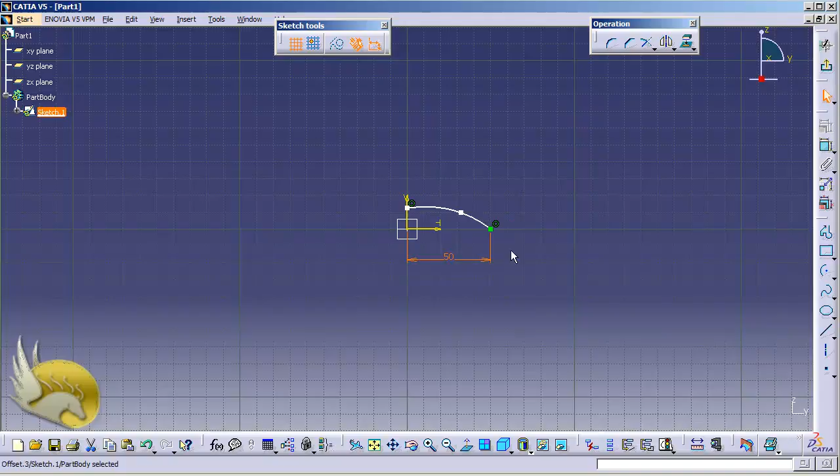First constraint is this. This point is going to be about 50 millimeters away from the center line. So I type in 50 here. And again, the constraint tool is selected. This point is going to be about 10 millimeters from the horizontal line, so I make sure that it's about 10 millimeters. And I can grab this point and move it so that this is the perfect curve that I needed.

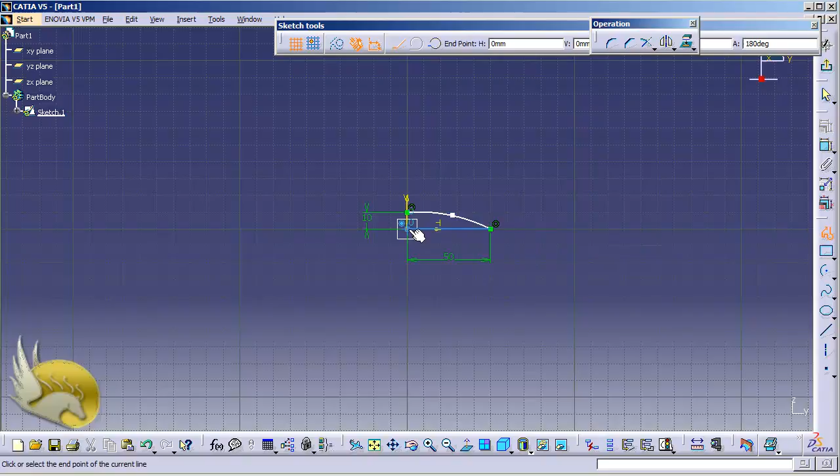Now I select the profile tool to complete this profile. I click here, go to the center line and go up to this point. You can see the filled circle that tells me I'm on a point. I double click here to finish this profile. Now I exit my workbench. I have this profile and I can use this for shaft.

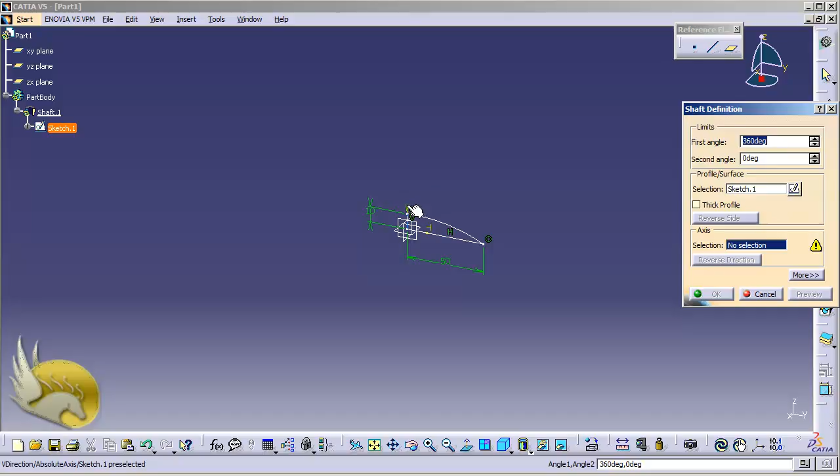I can select the shaft tool from the Insert menu, Sketch-Based Features, or from the toolbar that is available here. This is 360 degrees. The axis is going to be the vertical axis, and now you can see that I have created this shaft, and that's perfect for my purpose.

Now I'm going to cut some part of this, so I go to YZ plane to sketch environment. Now that I'm in this environment, I want to draw an arc here. First of all, I need to zoom in a little bit and pan down. Select the arc tool here and start here. For example, this is going to be the radius of the arc.

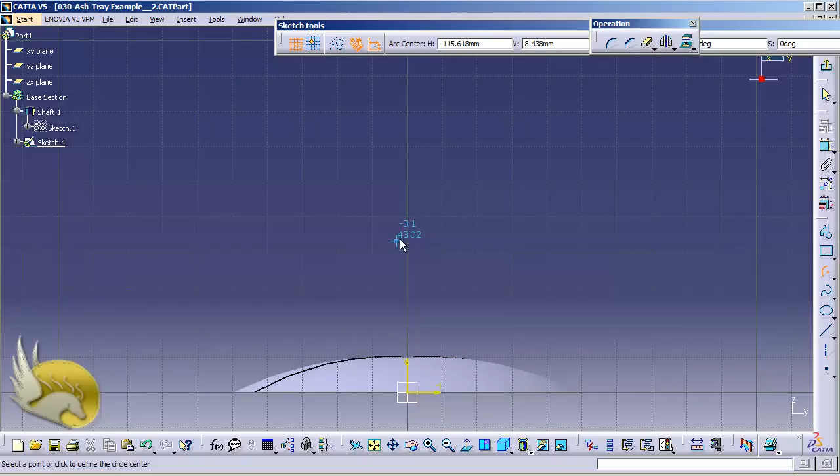And of course, I can set the radius of this semi-sphere part. So I make sure that this is about 50 millimeters, I guess. This is going to be the first point here, and now it is going to be about this much. Now I'm going to add some constraint to this, and this is going to be about 50 millimeters of radius. So I type in 50 here. About 50 millimeters of radius.

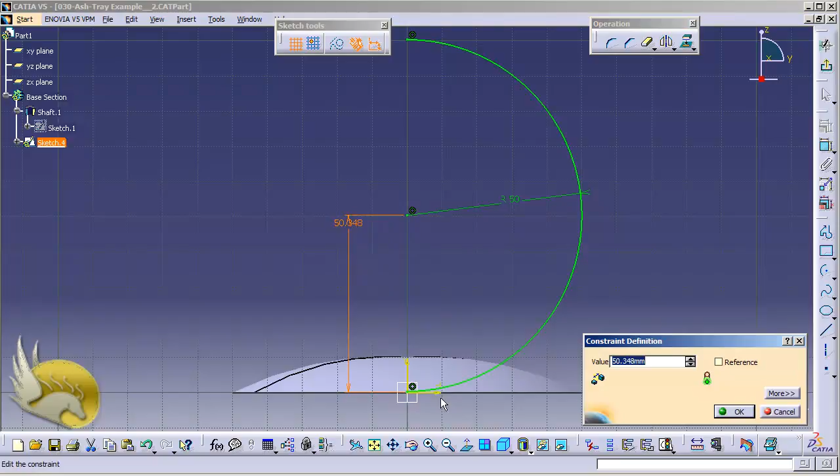And that's it. Of course, it is going to be a little higher, so it should be from the baseline. So I select this and select this. Now you can see this is about 50 millimeters. I want to make sure that about 55 millimeters of distance is there. So I type in 55 and that's it.

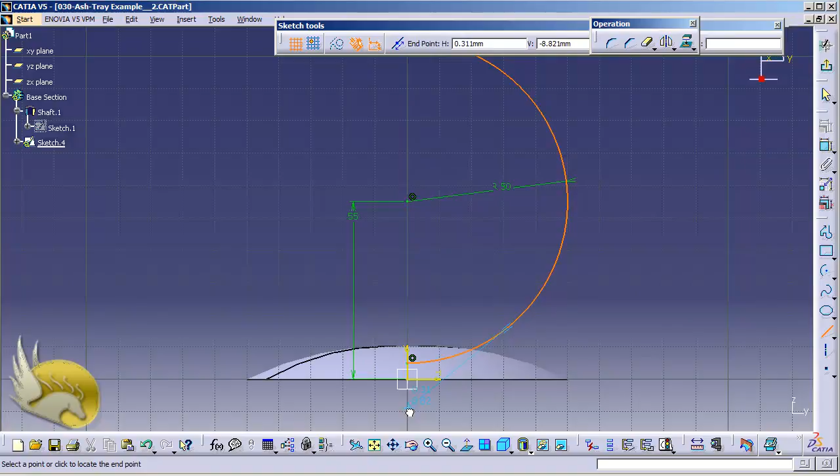And I want to have an axis here. First of all, I need to create an axis like this. Let's go further a little bit and select the line tool. I want to select this and go up. Of course, I need to zoom out a little bit. Now I click here. I need to quick trim. I select the quick trim tool and delete this part, select quick trim tool and delete this part, and that's it.

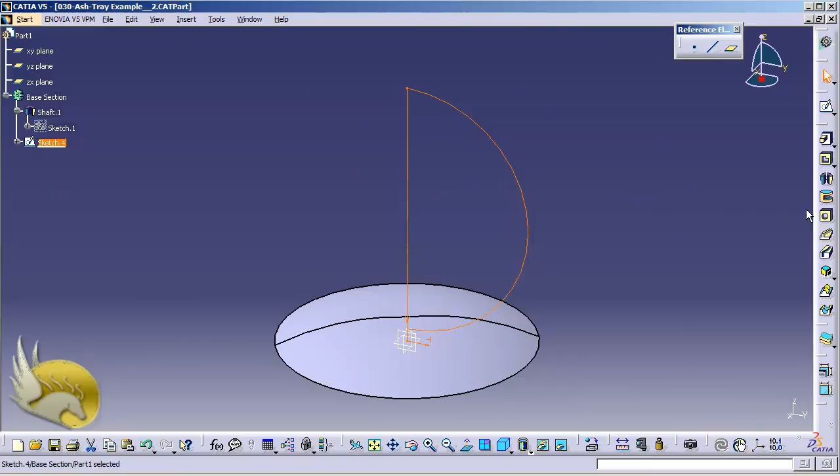This is the sketch that I'm going to use to cut through the base part. So I exit my workbench and select groove. This is the profile that is selected, and this is going to be the axis, and I can see that it cuts through the shape very nicely. Now I know that I have selected an arc for this, and of course I can select the same arc to create the sphere that I need.

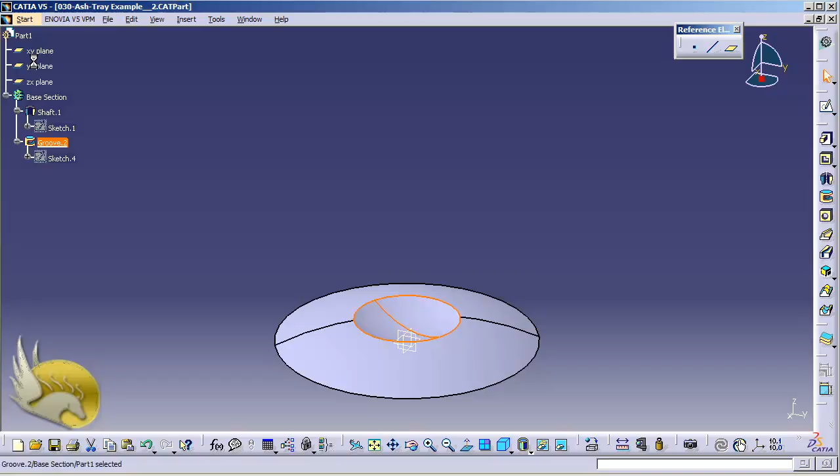So I go again to the XY plane. I go to sketch environment, and I'm going to select the sketch that I have used for groove, like this, and create the project 3D. You can see that project 3D will copy the same sketch in my sketch 5 environment. Now I'm going to use this, so exit my workbench first, and use the shaft tool to create this sphere here.

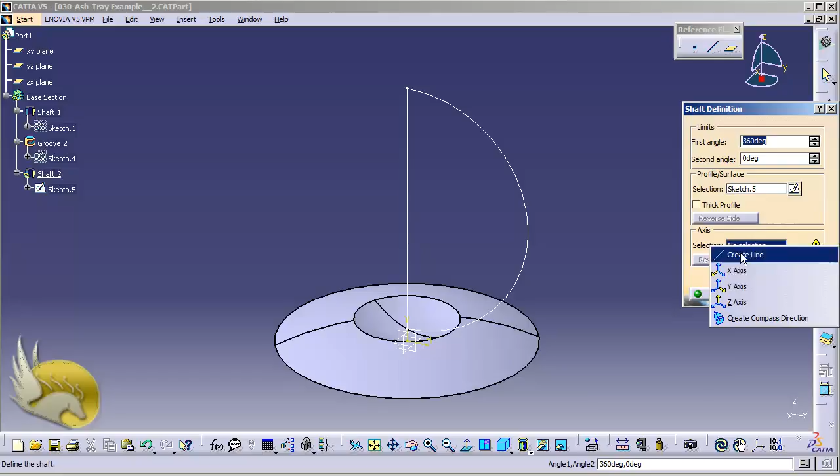So this is going to be 360 degrees, and this is the sketch that is selected, and this is going to be the axis. First of all, I need to select an axis. The Z axis is nice. You can see this is the sphere that I need to have. Now I'm going to cut some of this sphere.